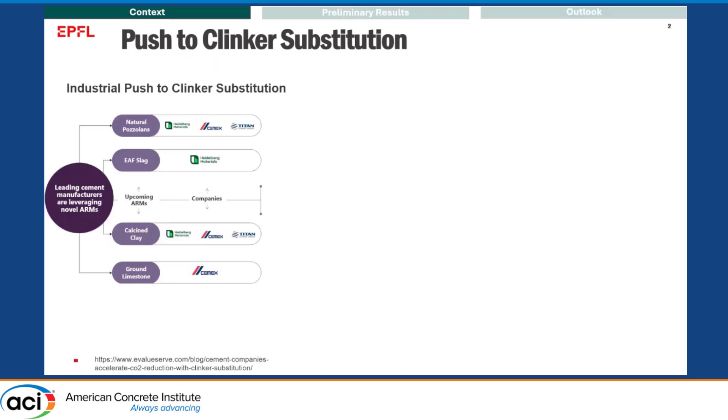There is a lot of buzz around clinker substitution. I would like to think of it in two ways. There is a push from the industrial side where lots of industries are investing in alternative materials, and there are lots of startups in our space too that are coming every day. It is a good thing, and another good thing happening is the regulatory push to clinker substitution. If you look at a recent bill from the US government, they declared a $1.6 billion investment in cement and concrete decarbonization, which is huge.

I would also like to point out that 3 of those 6 projects are concerned with LC3, limestone calcined clay cement, which is also dealing with clinker substitution. So I would like to make it clear that it's not just us in the lab who are working on clinker substitution, but everyone outside is also looking at it.

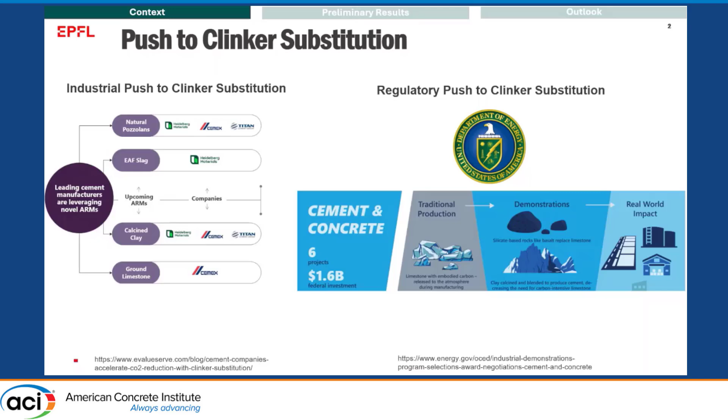For a second, sorry to make you feel dizzy, but I would also like to bring attention to the standards, what European standards have been doing and are planning to do with clinker substitution. On your left, this standard has been standing for almost 25 years with almost 27 common cement types. On your right, there are 2 standards. One allows for the usage of limestone calcined clay cement, and the other is recycled concrete fines.

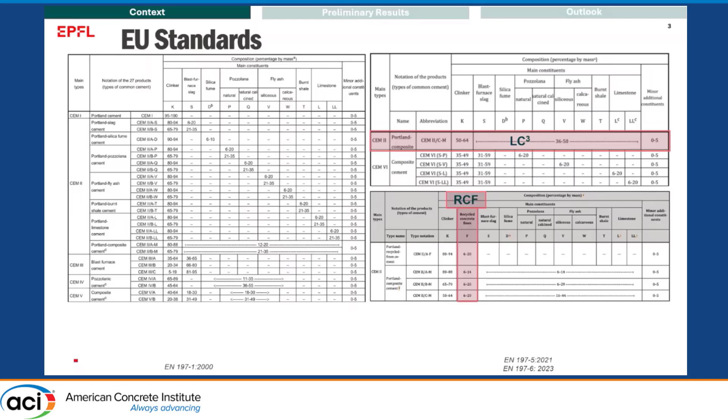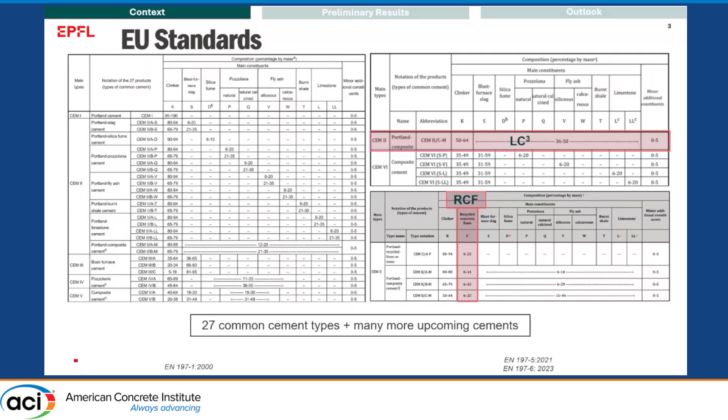I'm going to talk about these materials, so I put them here. But the main message is that there are a lot of common cement types, and there are many more upcoming cements. So what it implies for us is that cement composition is being diversified, and there is also an increase in the clinker replacement for a given blend.

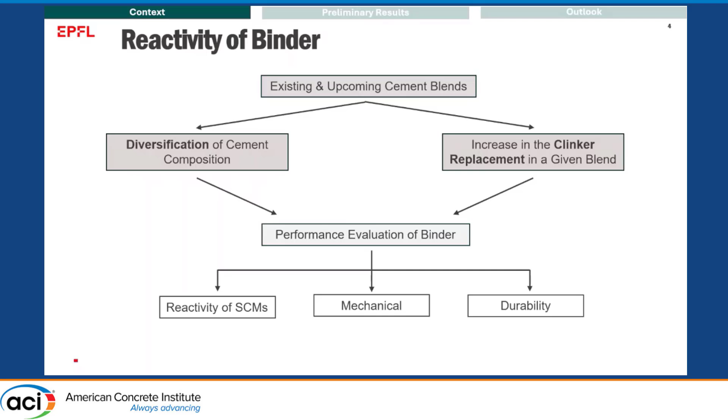So this calls for a good performance evaluation of binder, and this can be categorized into 3 main areas with respect to reactivity of the SCMs, mechanical performance, and durability performance. My talk here is concerned with exploring this link between reactivity of SCMs and the mechanical performance of the blends. But my main PhD topic is durability. If anyone wants to talk about it after the talk, I'm happy to share some ideas.

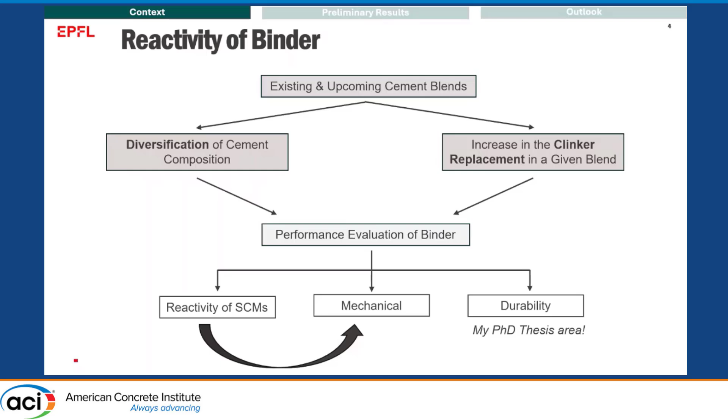All right, so let's get into the reactivity testing. There are a variety of reactivity testing methods from the past, but recently many of them reached consensus about R3-Reactivity test being one of the efficient methods to understand the intrinsic reactivity of an individual SCM.

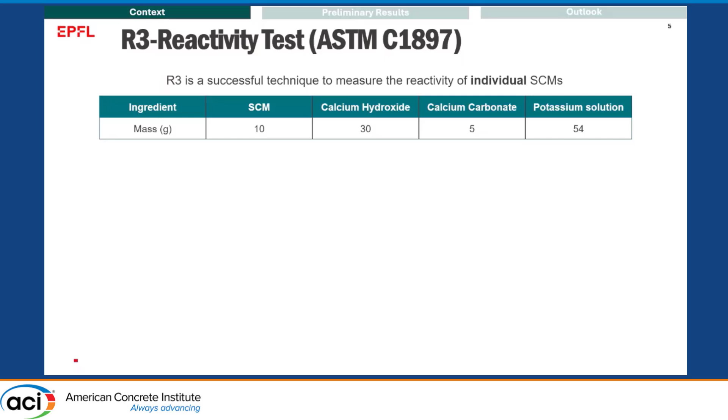So in short, what we do in the R3-Reactivity test is we have an SCM, and we let it hydrate in the presence of excess calcium hydroxide, as you can see here. These are the mix proportions, by the way. In excess calcium hydroxide, also in the presence of carbonates, alkalis, and sulfates, a system similar to cementitious system. And we measure either the bound water or the heat signal, run for 7 days at 40 degrees Celsius.

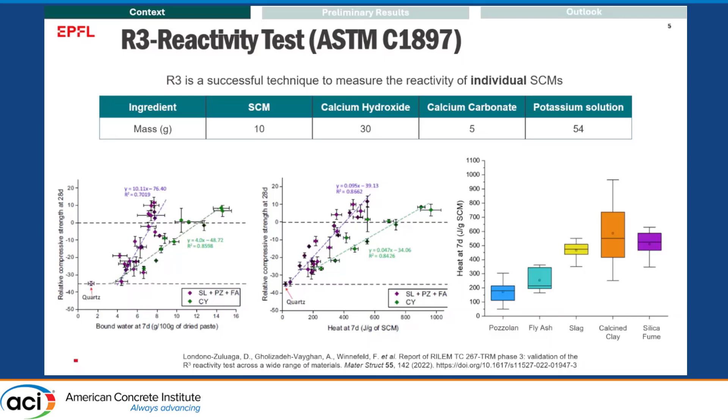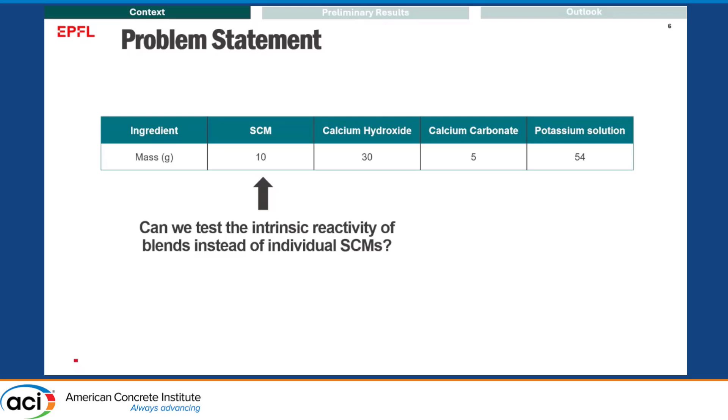With this background, I'd like to introduce the problem statement. So far we've been measuring the R3-Reactivity heat of individual SCMs, but say we have ternary or quaternary blends where more than one SCM is used. Can we test the intrinsic reactivity of those combined blends instead of individual SCMs? This is the problem we're trying to solve.

Let's get to the results, starting with materials. I've been using LC3, limestone calcined clay cement. For those who don't know, LC3 cement was first formulated and developed at a lab at EPFL. Here is a picture of a cement bag with LC3-50. The 50 refers to the amount of clinker replacement, so 50% of clinker is replaced with calcined clays and limestone.

Here it is a 2:1 replacement, as you can see, 30% to 15% of limestone. So it is a 2:1 replacement.

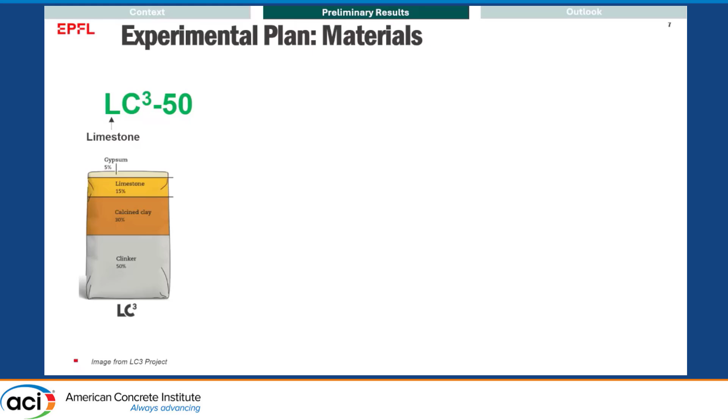Apart from LC3 mixes, in this study I also worked on recycled concrete fines. I got these fines from a company in Netherlands. In Europe, almost 350 million tons per year of construction demolition waste is being produced, and we need to tap into the potential of this demolition waste and try to turn it into something useful.

The recycled concrete fines I was using had an R3 heat, individual heat, of almost 100 joules per gram SCM. To visualize how this performs compared to other SCMs, let's bring back this heat envelope graph. If you place the R3 heat of the recycled concrete fines, as you see on the right, it is performing equivalent to the lower end of natural pozzolans. So it is not completely unreactive, but it's not very reactive.

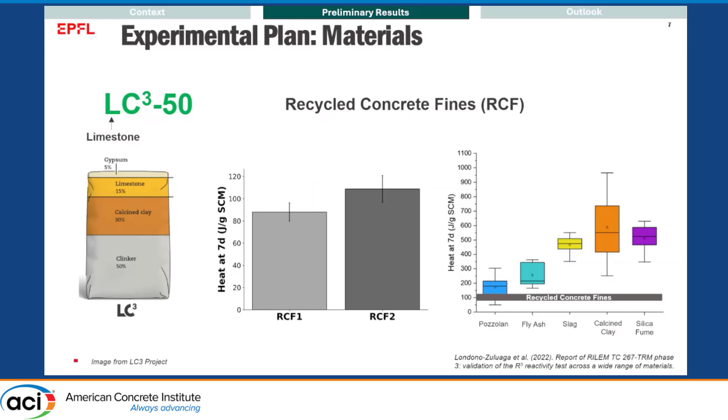It's in between. So what we decided is to use this as a replacement for limestone in the LC3 system. And if I'm replacing the entire limestone in LC3, I should probably call it RC3, right? So RC3 here - R refers to the recycled concrete fines.

The proportions of the mixes are LC3-50, RC3-50, with two different calcined clay to filler ratios - one is the 2:1 blend and the other is the 1:1 blend. In the R3-Reactivity test as well, instead of the individual SCM, we put the entire blend in itself, both the calcined clays and fillers in their respective ratios, and we do the same for the compressive strength and look at the correlations in the results.

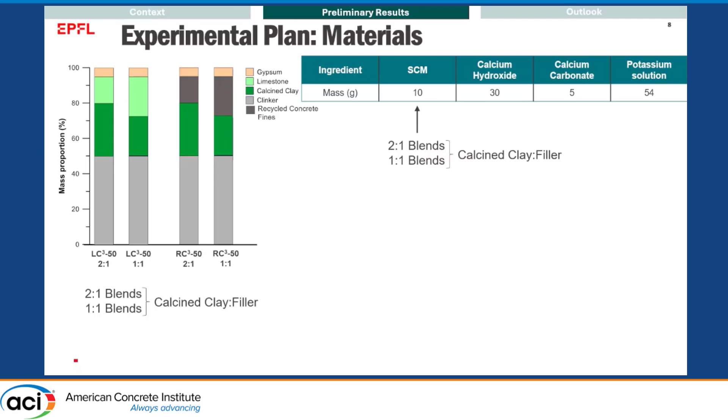Another variable we tried to vary is the clay kaolinite content. As you can see, 3 clays were used - C1, C2, C3 - with different percentages of equivalent kaolinite content. Clay 1 has the highest kaolinite content and refers to higher reactivity compared to clay 2 and clay 3. The fillers are limestone and two recycled concrete fines. So we have 3 clays, 3 fillers, 2 blend ratios - in total 18 mixes were tested for R3-Reactivity test and mortar compressive strength.

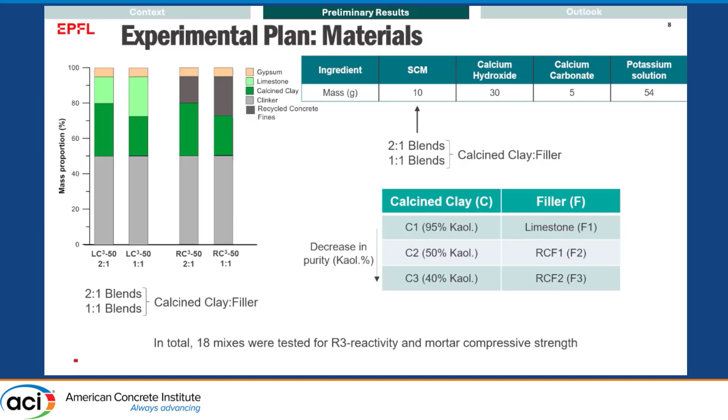Let's look into the interesting part, the results. Here I'm going to show the 28-day compressive strength versus the 7-day heat, in joules per gram SCM - but I'd like to clarify it's joules per gram blend instead of SCM, because I'm putting in the combination of blend. These are the results for the 28-day strength.

The trend lines are separated for both 2:1 blends and 1:1 blends. You can clearly see the correlation is good for the 2:1 blends between 7-day heat and 28-day strength, while the correlation for 1:1 blends is bad. The same story repeats when correlating 7-day heat and 90-day compressive strength, where R-squared values decreased a bit, but more or less the 2:1 blends are still very well correlated.

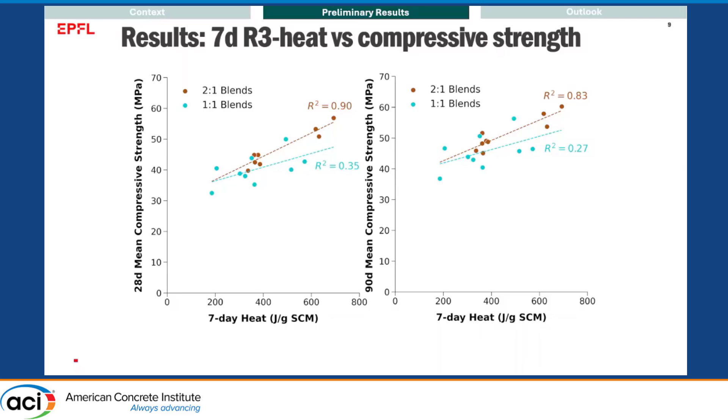Let's take a closer look at the 28-day compressive strength versus 7-day heat, and this is the trend line that I showed.

Is there something evident from this? I think it is clear that we have clustering of data where 3 data points are on top and the rest are at the bottom. I'd like to make it clear that the top data points in brown actually correspond to the blends with the highest clay kaolinite content.

So it implies that kaolinite content of clay dictates both the 7-day heat and compressive strength development, at least for 2:1 blends. All the other blends have clay contents with 50% and 40% kaolinite content.

So what this means is, say you have X number of calcined clays and Y number of fillers, and you want to narrow down your combinations. You can just do 7-day R3 heat, look at the heat signal, and decide if this blend is good enough to give you a good 28-day compressive strength or not.

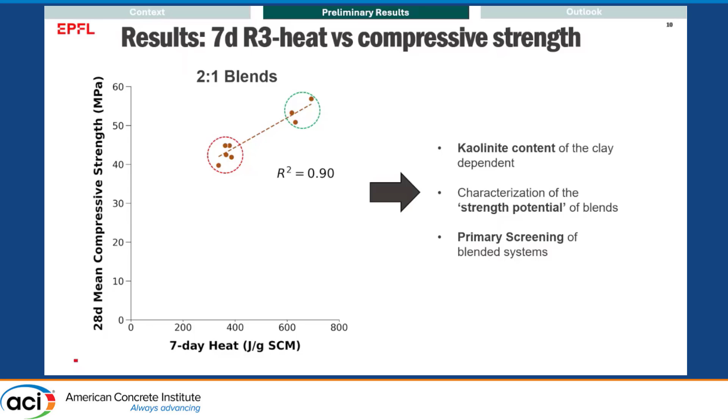So I think this is really useful in narrowing down your blended options. I'd also like to think of it like a primary screening of blended systems when you have 2:1 blends. But things get more interesting when you go into the 1:1 blends, because I don't know what to think of this data.

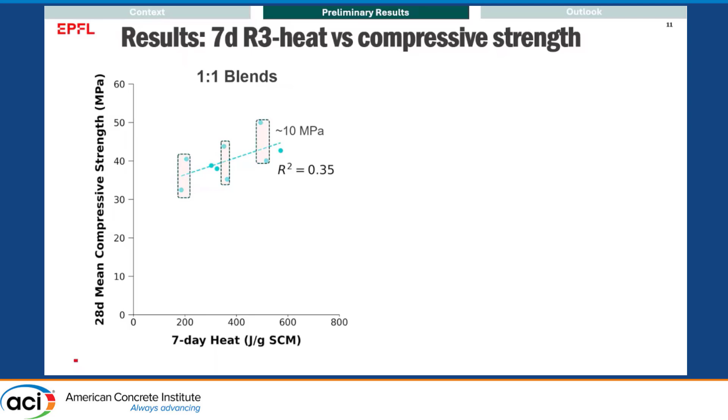All I can say is that for similar heat on the x-axis, you see a shift of almost 10 megapascals variability in the y-axis. So it means there is a variation of 10 megapascals of strength for similar heat values.

And this case is different from the previous case because here we are looking at 1:1 blends. If you remember, 1:1 blends have higher filler content compared to the calcined clay, compared to 2:1 blends. So this could be explained.

I think this variability could be explained by microstructural characterization, which I plan to do in the future. But I have a small hypothesis, inspired from the literature, that aluminate phases are responsible for rapid heat evolution. So in the R3 heat, more aluminate phase formation could lead to a higher heat signal, but the contribution to strength might be lesser. This needs to be validated with microstructural characterization.

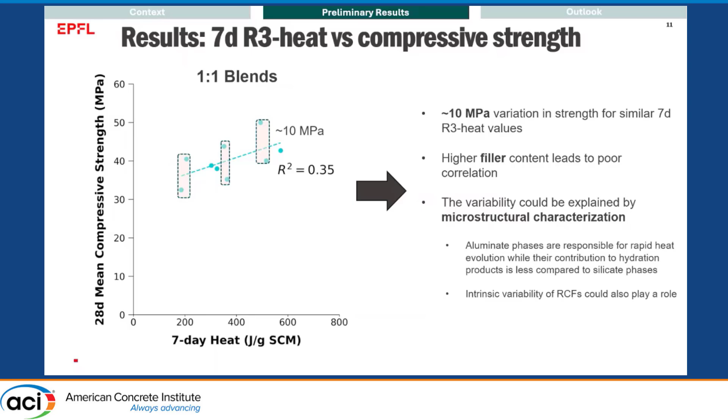Another thing to note is that recycled concrete fines have variable properties. When you do strength tests with the same sample twice, the results might not be as similar as with other SCMs. So there are some challenges to deal with, but this will be addressed in my future work.

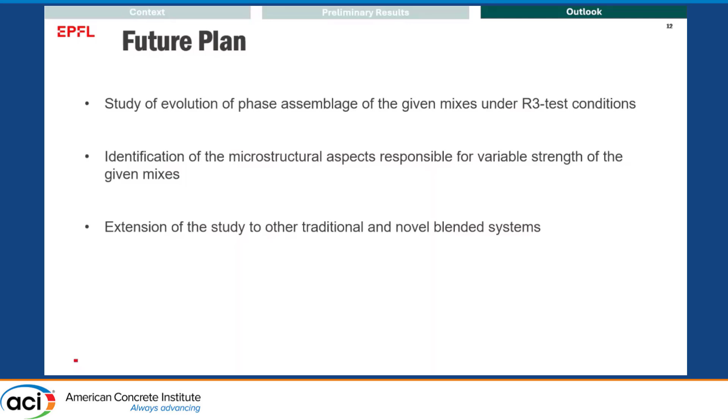I'm going to study the evolution of phase assemblages using XRD, and also look at microstructural aspects and porosity aspects, and extend this study into other traditional SCMs, because so far I've talked about LC3 and RC3, but we can also see how combinations of blends of other SCMs perform with respect to R3 heat.

So in conclusion, I used calcined clay and filler in different ratios. When I used it for 2:1, I realized that R3 heat can be directly performed on the 2:1 calcined clay to filler blends, and it can be used to estimate the strength potential, or to do the primary screening of the blends.

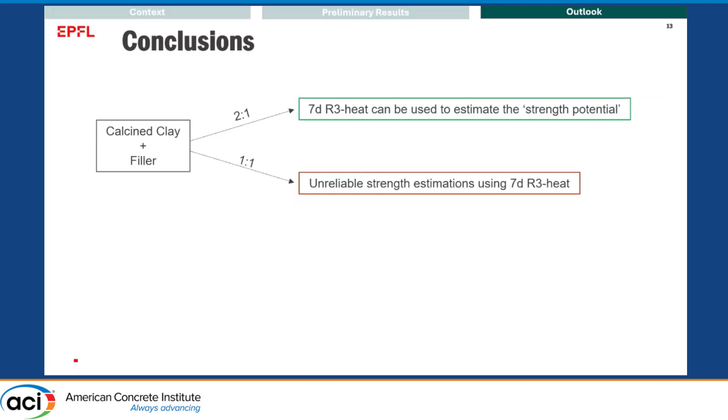On the other side, for 1:1, I would really not suggest doing that, as there are unreliable strength estimations, and this needs to be explored more via microstructural characterization.

What about in between? What about 1.5:1? What about the ratios in between? I absolutely have no idea, but this is research in progress, and this is what we are trying to do and extend to other SCMs.